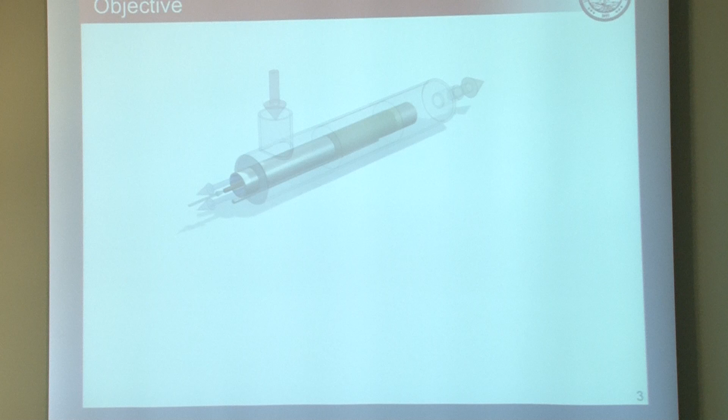The objective of this entire PhD dissertation was to produce pure hydrogen. I used the membrane reactor as a tool to achieve this pure hydrogen. I took natural gas and performed natural gas steam reforming within the membrane reactor to produce that pure hydrogen. The idea is to take that pure hydrogen and feed it into a PEM fuel cell, which can then be used for the transportation sector. I picked a PEM fuel cell because it has a low operating temperature, and its only emission is water. Furthermore, as a co-benefit of this membrane reactor, there's a high concentration of CO2, which has potential to be captured, thus mitigating emissions from the transportation sector.

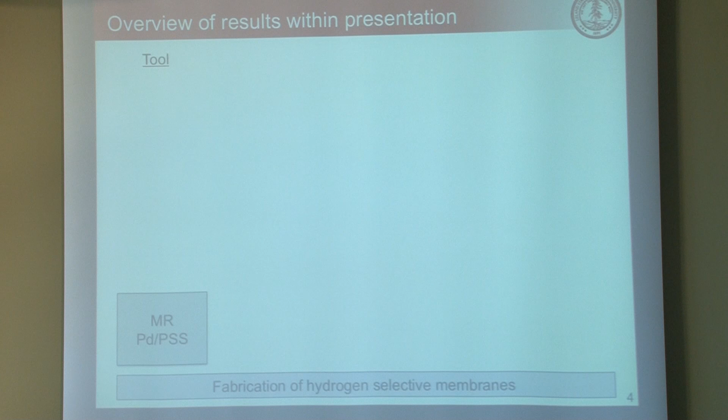A little bit of an overview of the results I'm going to show. I'll talk about the fabrication of these hydrogen selective membranes. Then I'll get into the performance of a membrane reactor—MR—using a pure palladium porous stainless steel supported membrane, again using the steam methane reforming reaction, with two different feeds. You'll notice CO2 here, a common component within natural gas—again, the idea is to use natural gas in the end. I'll get into these conditions a little later.

The next membrane reactor I'll talk about is pure palladium on a ceramic supported membrane. Similarly, steam methane reforming—you can see here there's two different kinds of feeds, nitrogen as well as CO2. Again, both of these are common impurities within natural gas. Some of the conditions here.

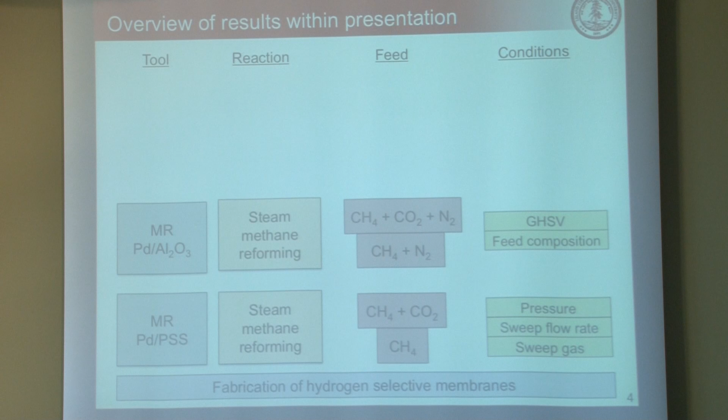The final membrane reactor I'll talk about is an alloy with palladium gold supported on porous stainless steel. With this I'll use natural gas specifically—that is, the mixture of hydrocarbons as well as CO2 within the mixture. So, bringing it up a notch. Here's the conditions. Then briefly at the end, I'll talk about the feasibility of this for onboard application.

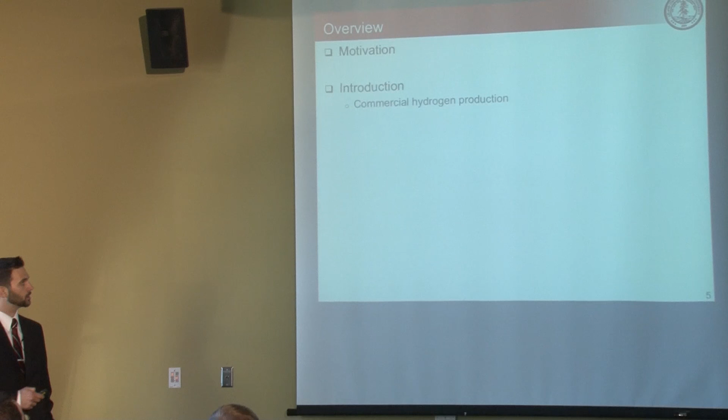A little bit of an overview of the talk. I'll talk about the motivation for this work, an introduction covering commercial hydrogen production currently in the world, and hydrogen production via the membrane reactor. Furthermore, I'll talk about the fabrication of the palladium-based membranes, some experimental results using both steam methane reforming and natural gas reforming, and I'll give a real-world example at the end. All right, let's get into it.

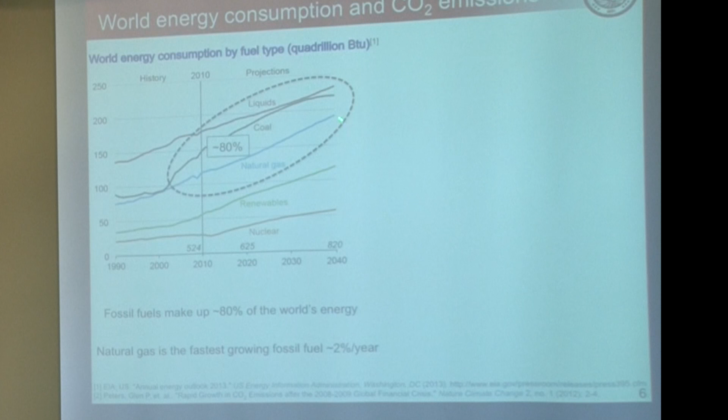The motivation here: as we all know within this department, world energy consumption has historically been on the rise and is projected to continue rising. Specifically, fossil fuels make up about 80% of this increase, and natural gas is the fastest growing fossil fuel at about 2% per year. What does all this fossil fuel translate into? CO2 emissions. We can see developed countries are already at an elevated level, while developing countries show a significant increase in CO2 emissions. All these CO2 emissions have been directly correlated with global temperature rise, which we would like to mitigate.

So let's look at the US specifically. This chart shows the greenhouse gas emissions for the US, and transportation accounts for 26% of those emissions—a significant portion.

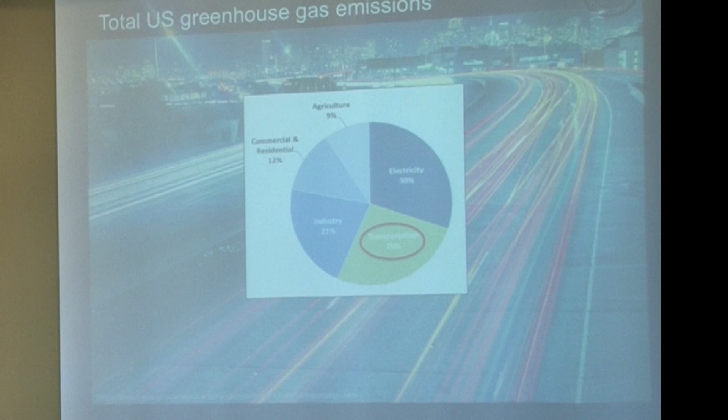If we look at the broader global scale, we can see vehicle ownership. Currently there's about 1 billion vehicles on the planet, projected to increase to 2 billion between 2030 and 2050. All these vehicles translate into more CO2 emissions into the atmosphere. But if we could potentially use hydrogen, maybe we can offset those CO2 emissions.

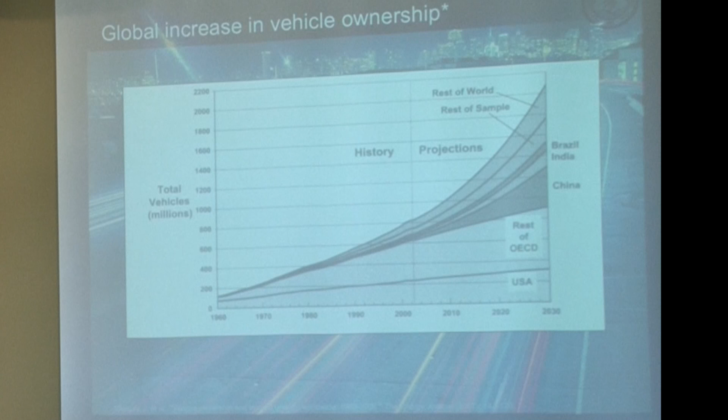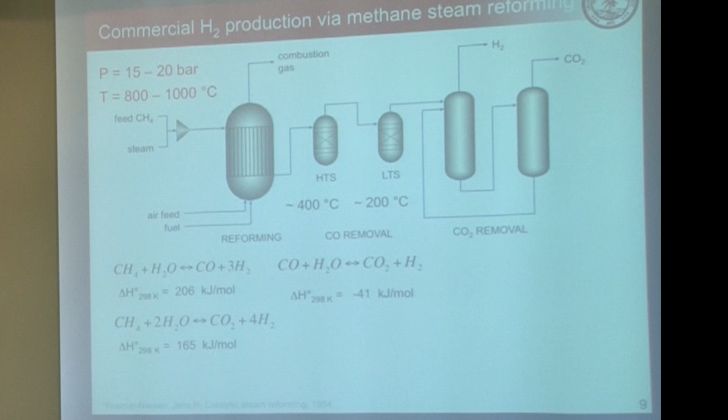So you may ask yourself, well, this process seems pretty large, there's multiple steps. Is there a solution where we can do all of these in one? There is—that is the membrane reactor. We can take this reforming process as well as the two reactors plus the purification and separation of hydrogen into one unit, all these steps into one. Powerful. So let me talk a little bit about how the membrane reactor works.

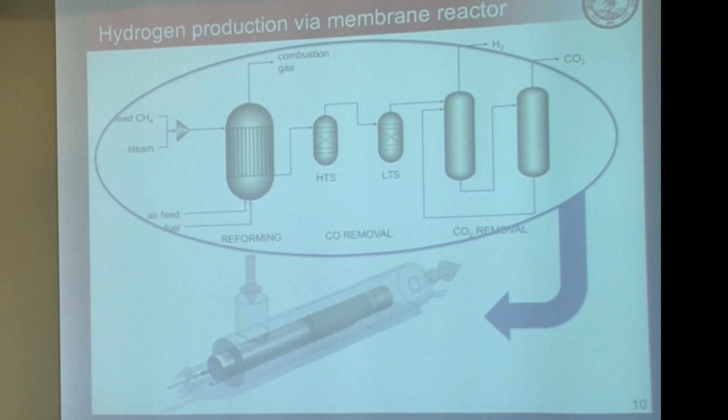So here's a cutaway of the membrane reactor. We can see hydrocarbons, so natural gas, and steam enter into the reactor. They convert into hydrogen here across the catalyst. The palladium-based membrane is only selective towards hydrogen—that is, only hydrogen can permeate through the membrane, shown here.

We can enhance this permeation of hydrogen through the membrane by applying a sweep gas through the permeate side of the membrane, as shown here, and the pure hydrogen comes out on this end here. On the back end, we have the emissions here, and this is known as the retentate side. This is the outlet of the reactor.

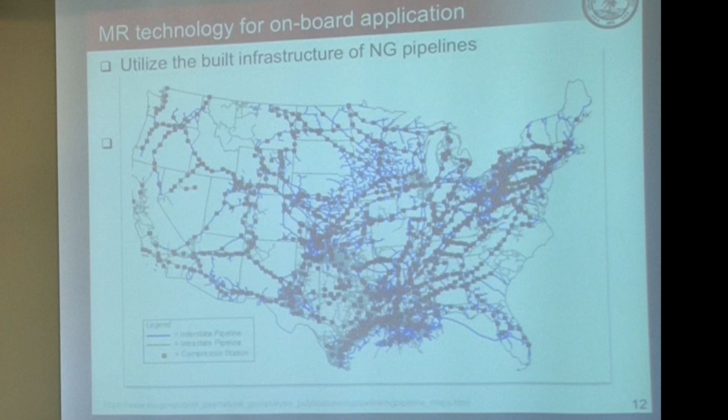Furthermore, this membrane reactor for onboard application can be a possible solution for distributed emissions, which there currently is no feasible technology for. And the reason I propose that is because on the retentate side, it's a CO2-rich stream that comes out, and it's possible that this can be a bridge for sustainable technology to come in the future.

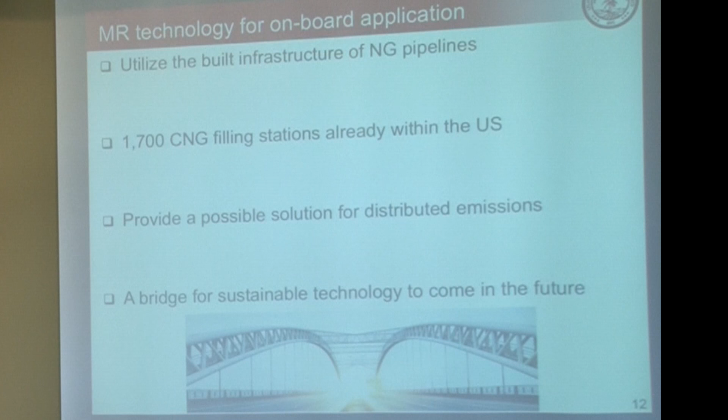So let me talk about why I chose the palladium-based membranes. We see here there's a good amount of membranes for hydrogen separation—that is metallic, polymeric, carbon, as well as two different ceramic type membranes. Let's look specifically at the metallic for hydrogen selectivity. We can see here that it's greater than 1,000, and if we compare that to these other ones, it's significantly greater. Of course, the idea here is to produce pure hydrogen, so that's a winner there.

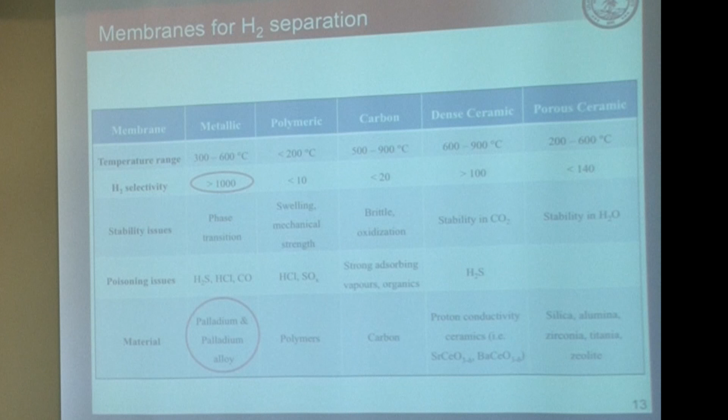Furthermore, if we look at the material used within these metallic membranes, it's typically pure palladium as well as palladium alloy. Palladium alloys are used to overcome some of the negative implications of using pure palladium—that is hydrogen embrittlement that happens with pure palladium, as well as being poisoned by sulfur. Specifically, sulfur is H2S, hydrogen sulfide, which is also a common impurity found within natural gas. So again, we can overcome these limitations of using pure palladium by alloying it with another metal, and I'll get into those details a little bit later. So metallic here is the clear winner.

So let me go into a little bit of how the fabrication of these hydrogen selective membranes was done. I was personally able to fabricate 6 of these membranes, as Jen mentioned, at Worcester Polytechnic Institute in Worcester, Massachusetts.

I used 2 different supporting materials of several that can be chosen: ceramic and porous stainless steel. Let me briefly talk about ceramic. The reason I use it is that the supporting material is characterized by small pore sizes, on the nanometer scale. Furthermore, ceramic is typically cheaper than some of these other supporting materials.

If we look at the porous stainless steel, it's good from a mechanical standpoint, that is, its stability is very good after the deposition of the layer on top. Furthermore, the thermal coefficient of expansion is very similar to that of palladium, or the palladium alloy that will be deposited on it. But unfortunately, the porous stainless steel supports have pretty high pore sizes, on the micron scale.

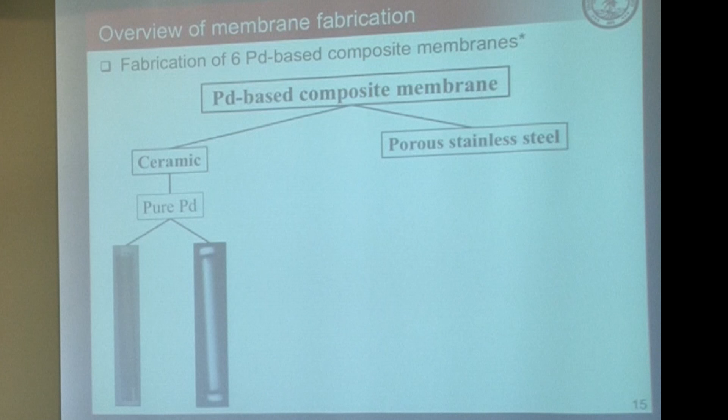So a little bit of detail here. For ceramic, I made 2 pure palladium membranes. And for the porous stainless steel, I made a pure palladium, as well as a gold-palladium-gold, palladium-gold-palladium, and palladium-gold. I tried to get all the combinations there. So specifically today, I'm going to talk about 3 different membranes, these 3 highlighted here. But before I talk about those membranes, let me briefly introduce how these membranes are actually made.

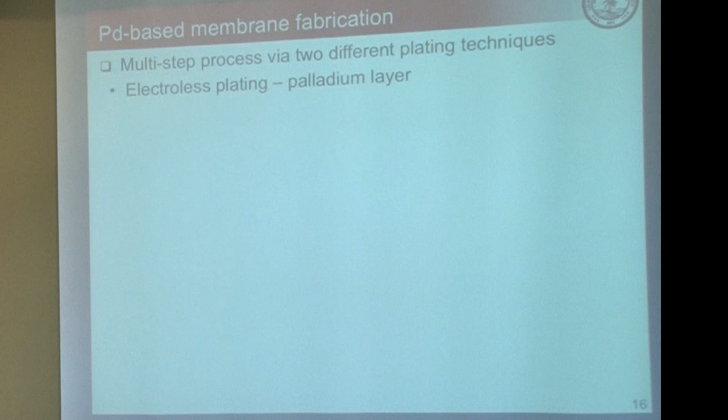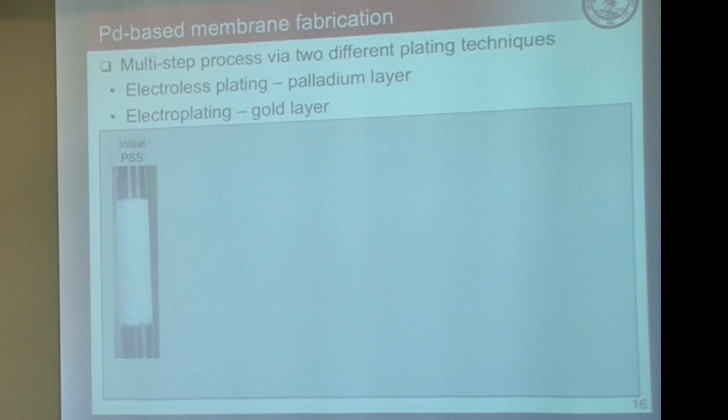This is a multi-step process via two different plating techniques: electroless plating for palladium, and electroplating for gold. So we started, for this specific example I'm going to show here, with the porous stainless steel support. You might notice here this color - this is actually a zirconia layer on the porous stainless steel support.

These porous stainless steel supports are obtained commercially. So what I had to do to prep this area is I had to actually sand it down a little bit, because the zirconia layer is potentially a little bit too smooth for the deposited layer to adhere. So after the sanding, there's an intermediate layer. This intermediate layer mitigates the intermetallic diffusion between the palladium layer that's about to come and the porous stainless steel support below.

So after this intermediate layer, first palladium plating, followed by a second, and then in this specific case, there was gold on top of that palladium, and then this was followed by a final palladium plating layer. That final palladium layer is to enhance the hydrogen flux initially when the membrane is brought up to temperature.

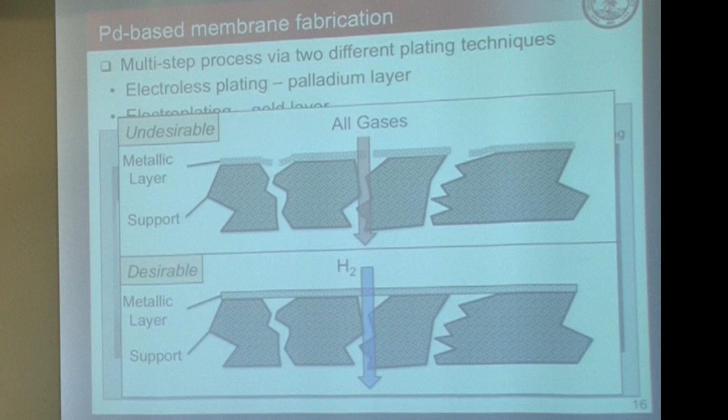So the whole point of this process, shown in the schematic - this is the undesirable case. That is, if I put this metallic layer and it doesn't bridge the supporting material below, it'll allow the permeation of all gases to flow through the support. Of course, the idea here is to be completely selective towards hydrogen to get that pure hydrogen I would like. So we can see in the desirable case, the metallic layer bridges the support below and is only selective towards hydrogen. Now let me talk a little bit about how hydrogen actually permeates through the metallic layer.

Shown here, this is the high pressure side, that is the feed side of the reactor. Hydrogen, H2, adsorbs to the surface, then dissociates into atomic hydrogen, H and H, diffuses through the metallic bulk, recombines on the low pressure side into H2, and then desorbs. Again, the low pressure side is typically referred to as the permeate side.

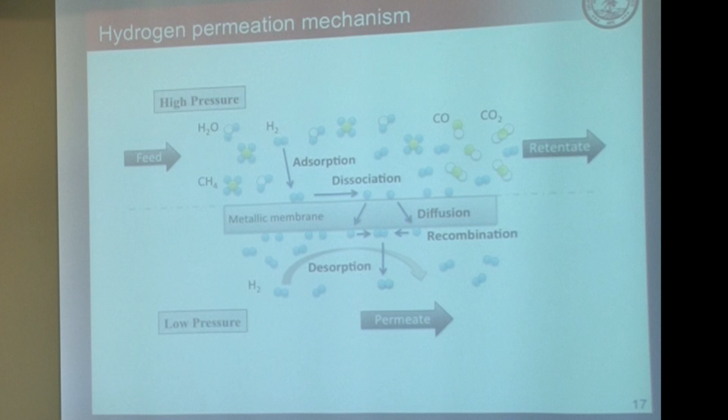So let's get into some of the results here. This first set of experiments is with the membrane reactor using pure palladium on porous stainless steel.

Shown in this picture is my second home here at Stanford, sometimes my first home, of course. Let me walk you through what this is here.

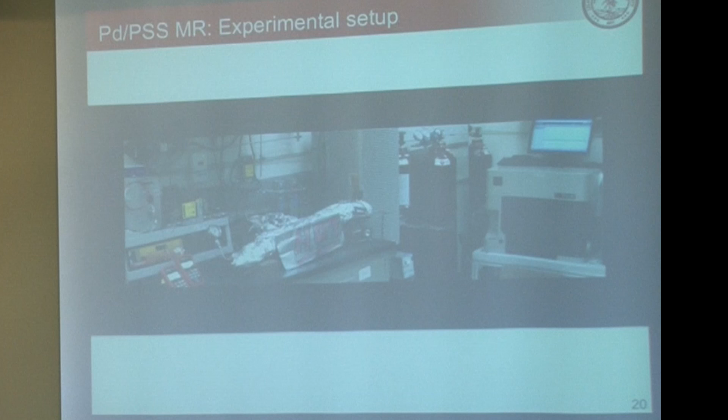So we have the feed as well as the water, and essentially I want that into steam. That enters in this preheating zone, which brings the feed and the water up to temperature, so that when it enters into the reaction zone, it's up to temperature already. All these experiments were characterized via a mass spec, and this mass spec can detect parts per billion, so very accurate.

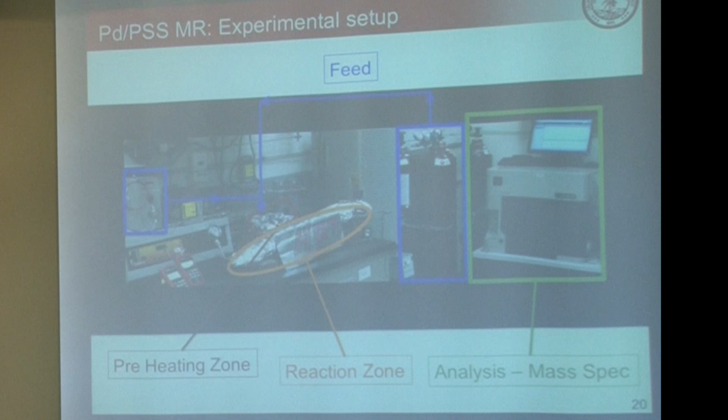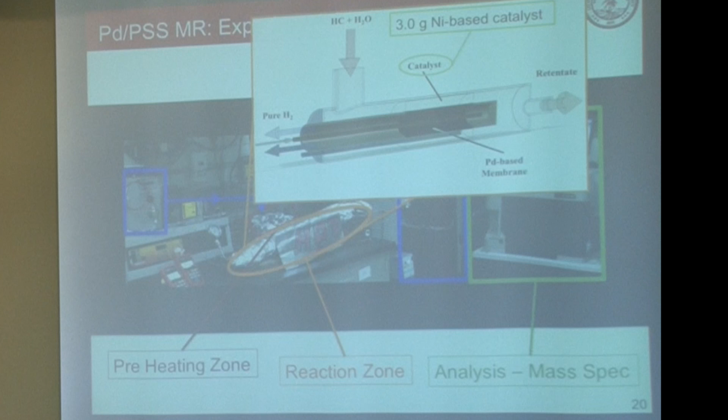If we look a little bit at the reaction zone, we can see this is the membrane reactor, as shown earlier. In this membrane reactor, I had 3 grams of a nickel-based catalyst, obtained from Johnson Matthey specifically. The membrane used was a pure palladium, porous stainless steel supported membrane. A little bit of the details: the palladium layer was 13 microns thick, the active length of the membrane was 14 centimeters, and the outer diameter was 1 centimeter.

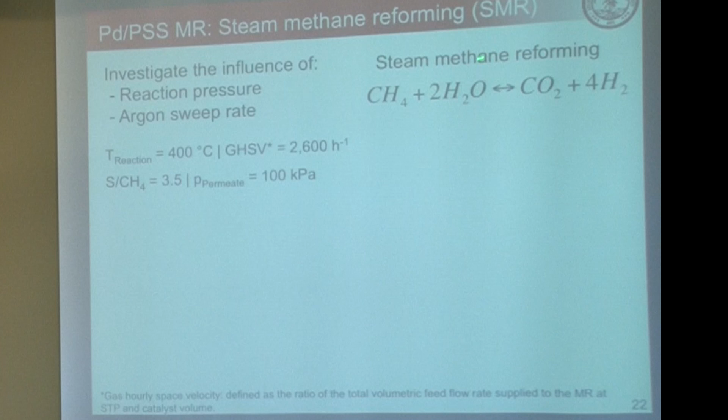Furthermore, shown here is the steam to methane ratio. Here I use 3.5 to 1. Theoretically it's 2 to 1, meaning for every 1 mole of methane, there should be 2 moles of water. The reason I use an excess of steam is twofold: one, it promotes this reaction towards its products, thus making more hydrogen, and secondly, it mitigates coke formation within the reactor.

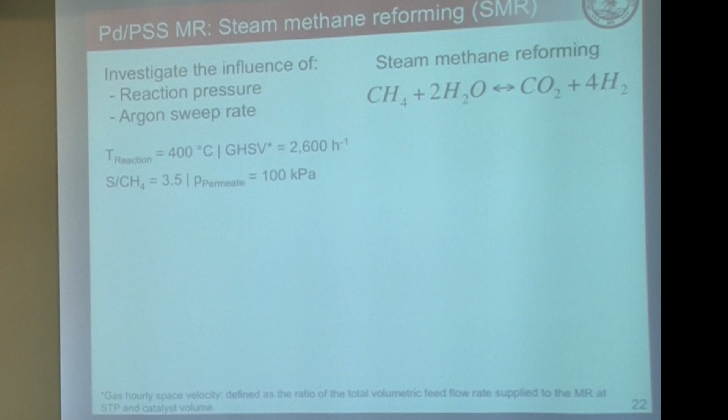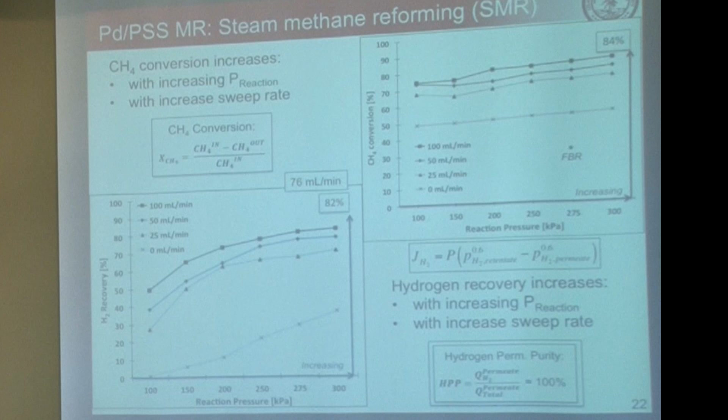Furthermore, as we increase the sweep rate, we can see a higher hydrogen recovery. For this specific set of experiments, I was able to obtain 82% hydrogen recovery, that is, 76 milliliters per minute of pure hydrogen from this process. Furthermore, I'd like to point out that the hydrogen permeate purity here was 100%, meaning only hydrogen was detected via the mass spec, no other species.

Another set of experiments I tried was adding carbon dioxide to the steam methane reforming reaction. This was twofold: one, it's commonly found within natural gas, as mentioned earlier, at about 3 volume percent. Furthermore, it's a product of the steam methane reforming reaction, so if we add a product of the reaction, it should negatively affect the conversion of methane. Let's see what some of those results look like.

So now you may think, well Bryce, this is cool here, but you're using argon as a sweep gas, and you told me the hydrogen is pure, but now we have argon as well as hydrogen, which is a separation issue. So if we think of the onboard application, what can we do for that?

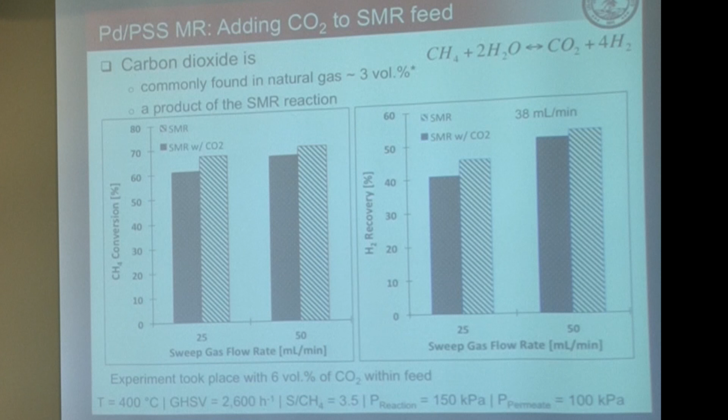Well, we can provide steam in the permeate side, which is easily condensable, thus can be used for onboard application. So let's look at what those results look like.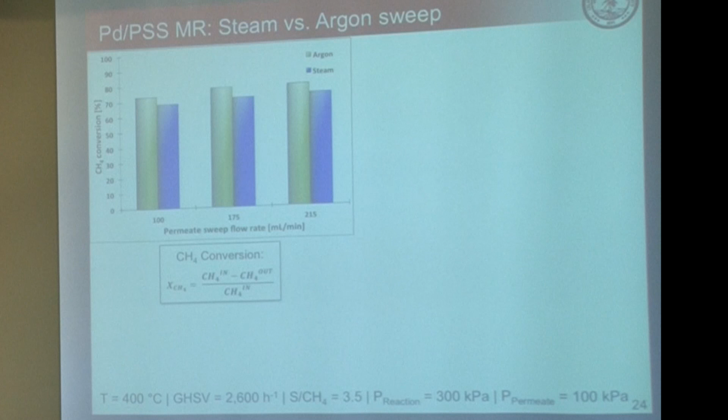This is important because, as mentioned, the steam can be used for the onboard application purposes. Furthermore, in the experimental testing, it's actually easier to use argon as a permeate—it's just one less complexity to the testing.

After these reaction tests, as well as others I'm not mentioning today for time, we can analyze the life of the membrane. We can see from this plot the ideal selectivity of hydrogen to argon. Initially it was infinite, that is, fully selective towards hydrogen, but it decreases over the experimental time. The total life here was 750 thermal hours, meaning it was up to temperature for that long, and of those 750 hours, 500 were under reaction testing.

If we compare the first test with the membrane reactor to the last test, we can see that the ideal selectivity decreased from infinite to just 30. Looking down this chart, all the parameters decrease. Specifically, the hydrogen permeate purity, instead of being 100% as it was initially, decreased to 90%.

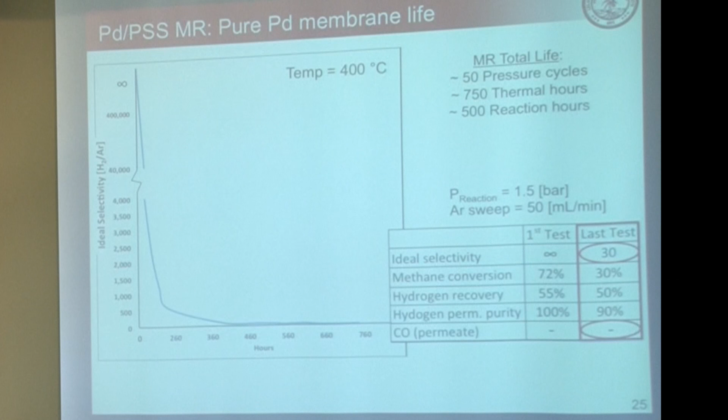Importantly, there was no CO detected in the permeate side. This is significant if we want to feed this to a PEM fuel cell, because only a few ppm of CO can poison the platinum catalyst within the PEM fuel cell. So I wanted to investigate why this ideal selectivity was so low.

So I wanted to zoom in further and look at the surface. I took some SEM images of the palladium surface. As we can see, highlighted in these red circles, there are actually holes within the palladium layer. If you look specifically here, it's very clear there's a hole in that palladium layer, again allowing permeation of all gases through the membrane. This is why we had this low ideal selectivity.

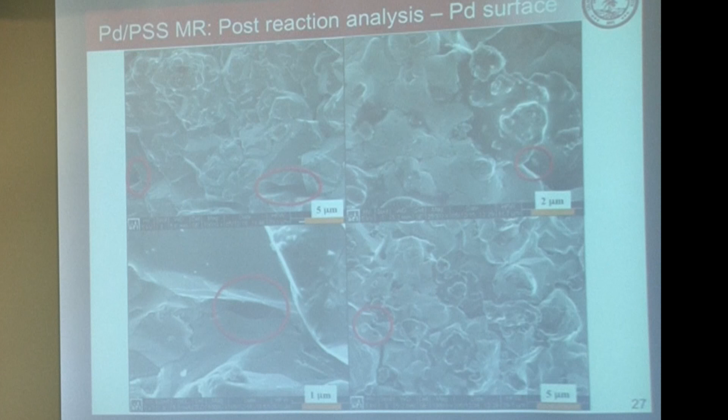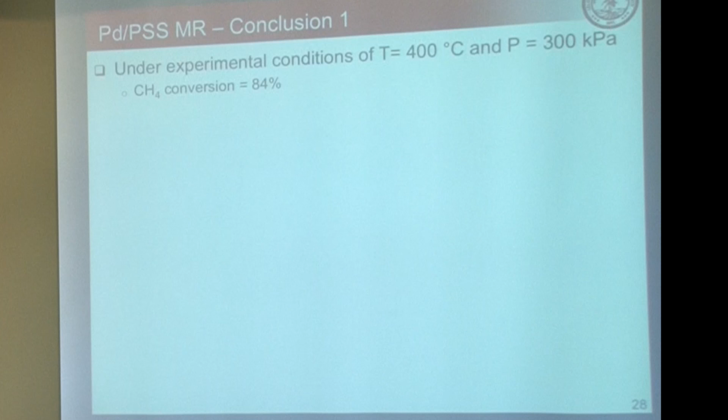So the conclusion of these results: by operating at a low temperature of 400 and a low pressure of 300 kilopascals, I was able to achieve a methane conversion of 84%. Furthermore, a hydrogen recovery of 82%, meaning I was able to obtain 76 milliliters per minute of pure hydrogen.

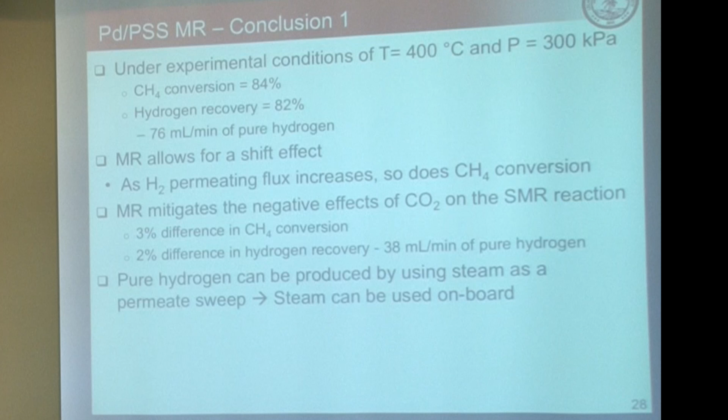As shown, the membrane reactor allows for the shift effect, meaning as the hydrogen permeating flux increases, so does the conversion of methane. Furthermore, I showed that the membrane reactor mitigates the negative effects of adding CO2 to the feed, resulting in just a 3% difference for conversion and just a 2% difference for hydrogen recovery. I also showed that pure hydrogen can be obtained using steam as a sweep, which is important for onboard application purposes.

Towards the end of the membrane's long life, unfortunately, it was not fully selective towards hydrogen. But as a potential benefit, there was no permeation of CO on the permeate side. So I thought, given the membrane degraded over time, is there a way to overcome that limitation? So I tried a palladium membrane supported on a ceramic support.

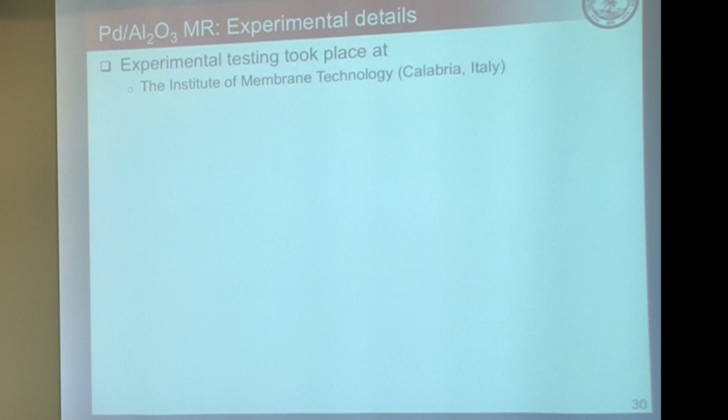This experimental testing took place at the Institute of Membrane Technology. As Jen mentioned earlier, I was able to go there in Calabria, Italy, the southern part of Italy, for one month and perform some reaction testing. Here's the membrane, the palladium with ceramic supported membrane. Specifically, the palladium layer is 11 microns, the active length is 7.4 centimeters, and the outer diameter is 1 centimeter.

Before reaction testing could start, I did the hydrogen permeation test to find the n value of 0.6 at 400 degrees Celsius. Again, most likely the membrane will not be fully selective towards hydrogen. So let's look at that module I used.

Here we have the feed that enters the reactor. This is the retentate side on this side. And then you can see here the sweep gas that comes through the core of the membrane and provides that pure hydrogen on this side, the permeate side.

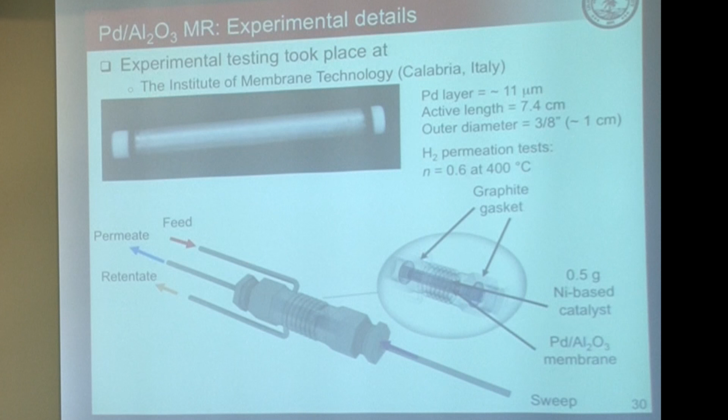More specifically, this membrane was held in place via two graphite gaskets, which minimize the leakage between the retentate and permeate side. That way, when we analyze the permeate side, we know that any gases there permeated through the membrane. Specifically here, I used just half a gram of nickel-based catalyst.

The operating conditions here are similar to those of the previous experiment. I'd like to note that instead of using argon, I used nitrogen sweep. Let's look at the results.

Here I have 2 different mixtures. The first is the steam methane reforming reaction, that is methane plus steam plus 3% nitrogen. The second mix is the same steam methane reforming plus nitrogen as well as CO2. I used CO2 and nitrogen because these are common impurities found within natural gas. Again, the end result here is to use natural gas.

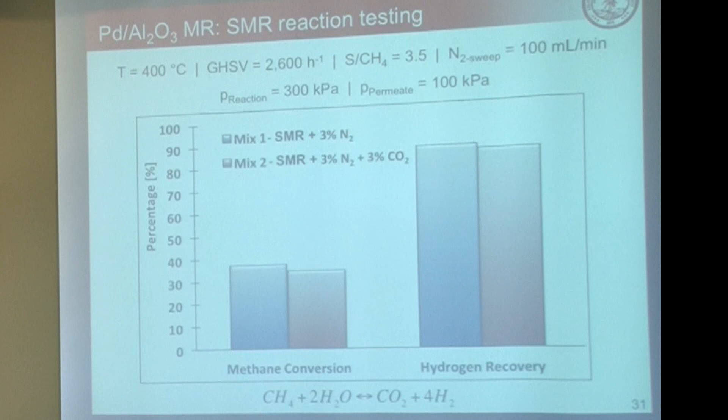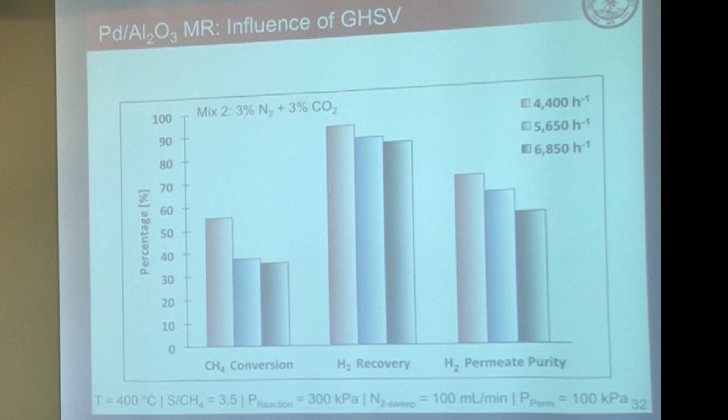Furthermore, I looked at the influence of the space velocity. As I varied the space velocity, we can see a decrease in the methane conversion. This is due to an increase in space velocity meaning less residence time within the reactor, so the reactants have less contact time with the catalyst.

As a benefit of this reactor, the hydrogen recovery was high, that is 92% for the lowest space velocity. But unfortunately, if we look at the hydrogen permeate purity, just 72% was obtained at the lowest space velocity, so not pure hydrogen. So I took the membrane out.

I wanted to analyze what went on here with the membrane, because clearly something was wrong. So again, some SEM images.

Here is the cross-sectional analysis of the membrane. We can see the palladium layer here on top of the ceramic support. If you look here, you can see that it appears as though the adhesion of the palladium layer is not very good with the ceramic below.

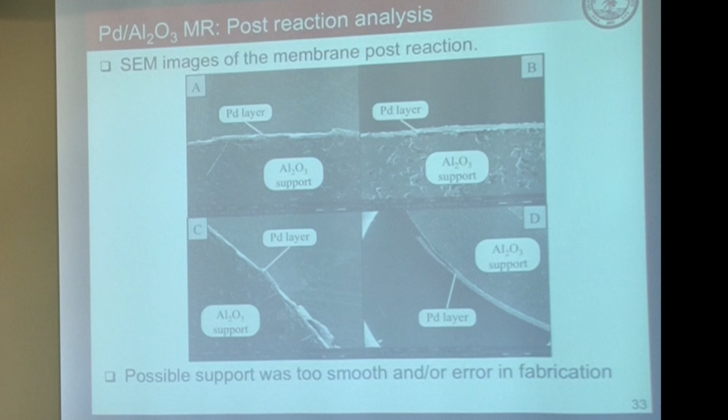This further drives home that point. As you can see, the palladium layer here appears to be peeling off the support below, also shown here. So unfortunately, this membrane didn't perform very well, that is, the support below maybe was too smooth, and/or there was an error in the fabrication process.

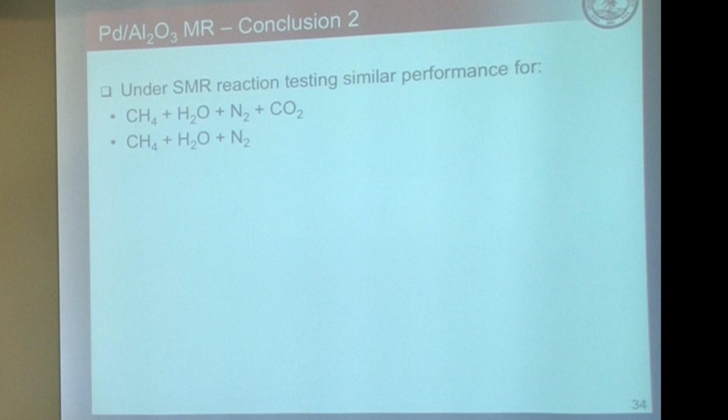So the conclusions from this experiment: there was similar performance using both steam methane reforming and nitrogen, as well as nitrogen and CO2. At the lowest space velocity, hydrogen recovery was 92%, quite high, but unfortunately the permeate purity was 72%. That is, the membrane degradation led to this poor performance.

So I just showed 2 pure palladium membranes on 2 different supports. Now I'm going to show an alloying, that is palladium gold, on porous stainless steel with this natural gas steam reforming reaction. This is the exciting stuff.

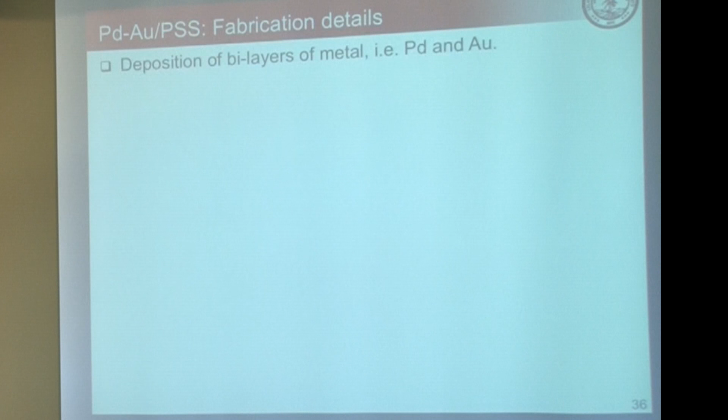So this membrane here was the deposition of 2 different metals, that is palladium and gold. The reason I chose gold here is twofold: the hydrogen permeability will actually be higher for this alloy at 5 weight percent of gold, as well as it's resistant to sulfur.

That is, it's potentially resistant to H2S that's commonly found within natural gas. I won't talk too much today about H2S, but I do in my dissertation on some other experiments that I won't go over today. Let's look at the membrane.

You can see here, here's the permeable area. You can see that gold layer below. On top of this layer is the palladium, which I'll show in just a minute. We see the total layer here is about 14 microns. The gold percent is 5 weight percent, which is known to be a higher permeability, which is why 5 weight percent was chosen. Active length of 3.6 centimeters, outer diameter of 1 centimeter.

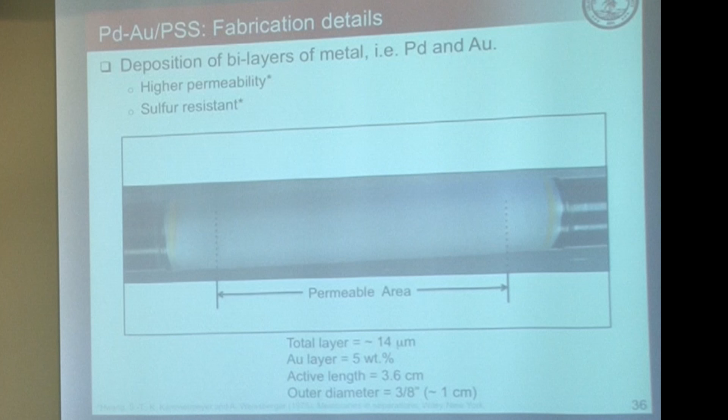So I'll show you a schematic. Again, I started with that porous stainless steel support with the zirconia layer that was commercially obtained. 2 layers of palladium deposited, followed by gold as well as the palladium on top. As mentioned, the palladium on top allows for an enhanced hydrogen flux initially when the membrane is brought up to temperature.

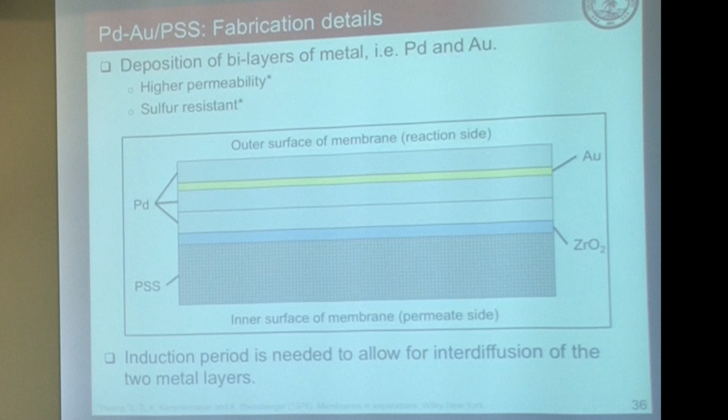Furthermore, as the membrane becomes an alloy, there's an induction period needed to actually interdiffuse these 2 metals together. So this can also help with that, having this sort of sandwich of the metals. So this induction period, let me talk about that.

And I stepped it up to the operational temperature of 450 degrees Celsius, which is the recommended operating temperature for this membrane. When the flux was constant, I was able to perform the reaction testing. But during this annealing process, I was able to characterize the membrane.

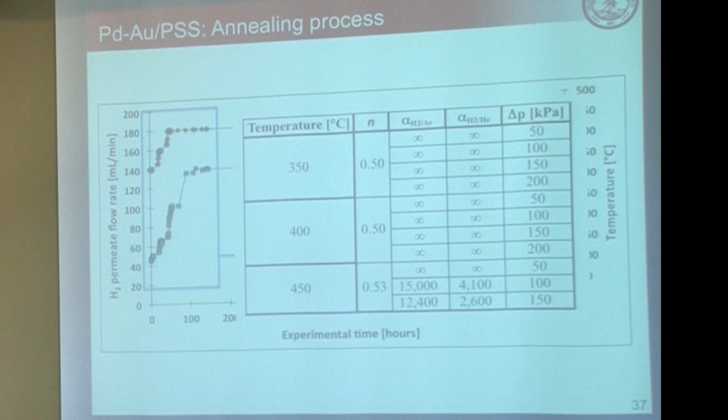Again, if we remember that DOE target is 10,000 for hydrogen to nitrogen, you can see that here for the argon results, they exceed that value. And after, I'm going to talk about the reaction testing here, which was in this time frame.

So some of the reaction details. Again, here I use natural gas steam reforming, and I'll compare that to pure methane steam reforming. The conditions are similar to those in the previous, but here I use the reaction temperature of 450 degrees. Again, this is related to the membrane's operational temperature.

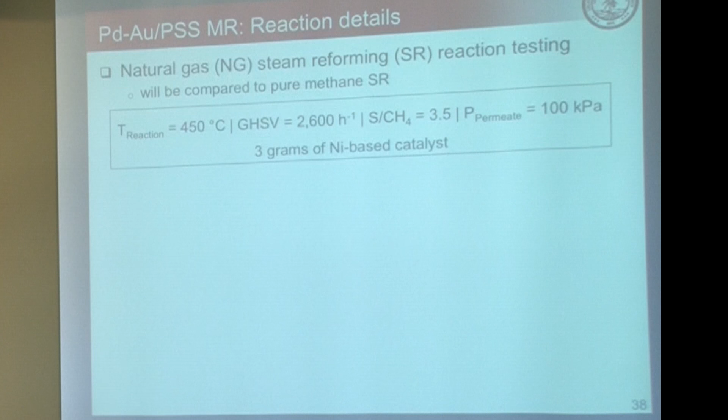Furthermore, composition of natural gas similar to pipeline quality. So I obtained data from PG&E from the Bay Area, shown here, of the various hydrocarbons as well as the impurities of nitrogen and CO2. And this is the experimental gases that I used. As you can see here, they're in good agreement with the pipeline quality.

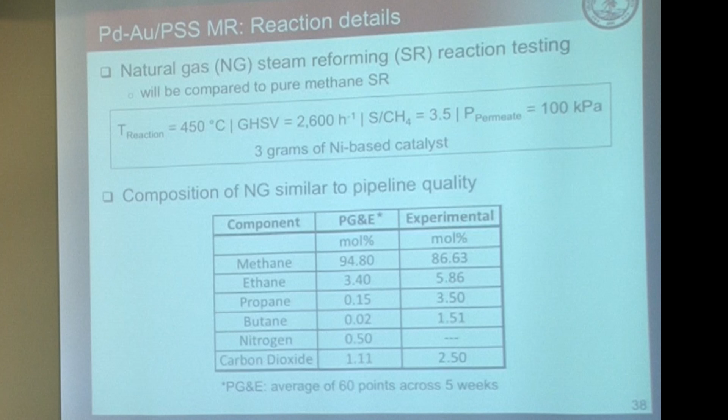So some of the reactions that take place, you can see here there's a significant amount of reactions that can take place within the reactor. That is owing to each one of the hydrocarbons respectively for their steam reforming. Shown here are just some of the dominant pathways of these reactions. Specifically, I would like to point out that some of these, ethane and butane, can actually produce methane within the reactor.

For hydrocarbon conversion, I'll talk about, that's the flow rate of the respective hydrocarbon in minus the flow rate of the respective hydrocarbon out, divided by the flow rate in. All right, let's get into the results.

So here I show pure methane. Again, this is with the same reactor. A pure methane feed here and natural gas feed. You can see for natural gas that the methane conversion was lower.

There's potential here that the formation of methane actually is part of this gap. That is, within the membrane reactor itself, the conversion of methane may have been similar to that of pure methane. But owing to the formation of methane, we see here a decreasing conversion.

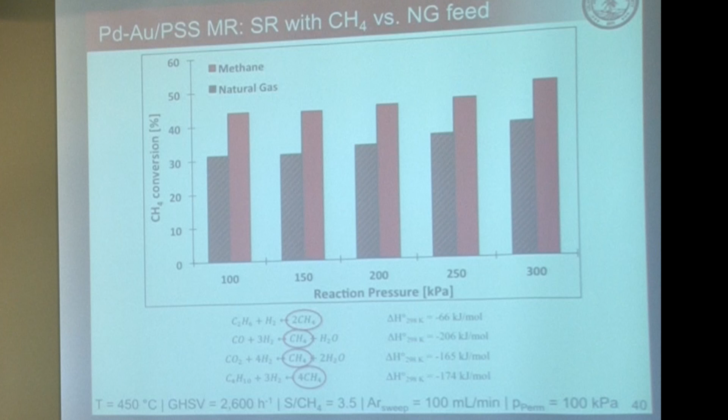Let's look at the hydrocarbons. So we have here butane, propane, and ethane. As we see here, as we increase the pressure, we see an increase in conversion. Again, if we look at these reforming reactions, they proceed with an increasing mole number.

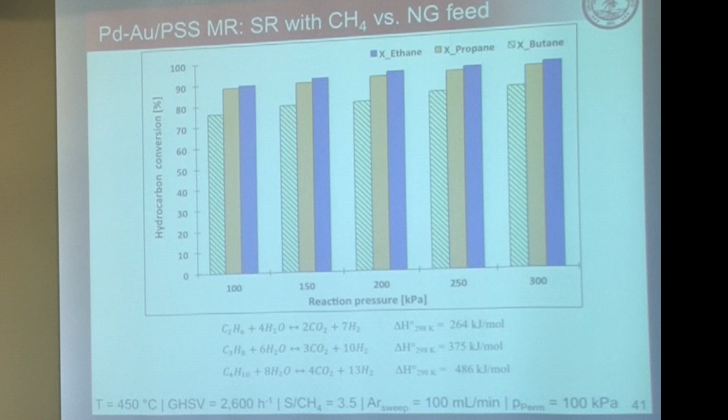That is, from a thermodynamic standpoint, as you increase the pressure, these conversions should decrease. But owing to the membrane's ability to shift these reactions towards their products, we can see an increasing conversion as we increase the pressure.

So specifically here, let's look at some of the hydrogen recovery. We can see here for natural gas that the hydrogen recovery is higher when compared to methane. This, if you look at these steam reforming reactions here, we can see that each one of their respective hydrocarbons produce more hydrogen per reaction. So I would expect there to be more hydrogen for the natural gas.

Specifically here, at the highest pressure, I was able to obtain 51 milliliters per minute of pure hydrogen. That is natural gas into the reactor, pure hydrogen out.

If we look here at the CO selectivity, defined by the equation here, but the CO selectivity is just a fancy word for the composition, that is the CO composition, within the retentate side of the reactor. We can see here as we increase the pressure, the CO selectivity decreases. This is owing to the water-gas shift reaction, that is, as the membrane is allowed to selectively permeate hydrogen, we can shift this water-gas shift reaction towards its products. And here at the highest pressure, CO selectivity of 0.62% was obtained.

And now, if we look at the CO2 selectivity here, we see similar to that of hydrogen, that is increasing. Again, this is owing to the shift effect. Specifically here at the highest pressure, we can see that the composition of CO2 in the retentate side was 27%.

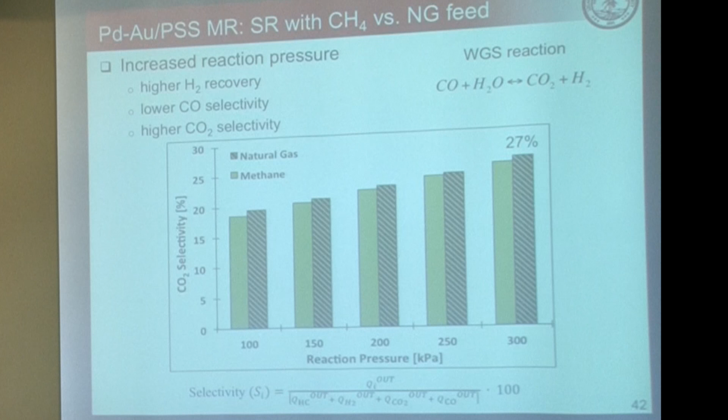So I want to look at the temperature effect on the membrane reactor, varying the temperature between 350 and 450 degrees Celsius. As shown here, as I increase the temperature, we can see an increase in conversion. The reason for this is twofold: from a thermodynamic standpoint, these are endothermic reactions, so as we increase temperature, conversion should increase. Furthermore, as I showed earlier, increasing the temperature of the membrane increases the hydrogen flux, further promoting these reactions towards its products. So again, we can see here an increase in conversion.

Let's look at the hydrogen. For the hydrogen permeate shown in this blue line, at just 350 degrees Celsius, I was able to obtain about 20 milliliters per minute of pure hydrogen production. If we increase that to 450, the flow rate of pure hydrogen was 60 milliliters per minute. Again, this hydrogen was pure, that is, 100% pure hydrogen.

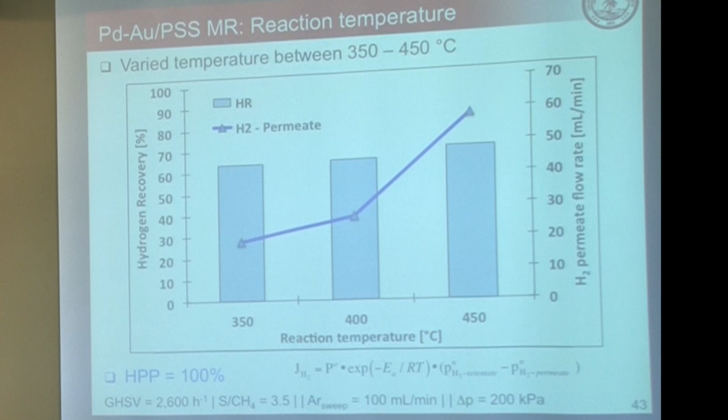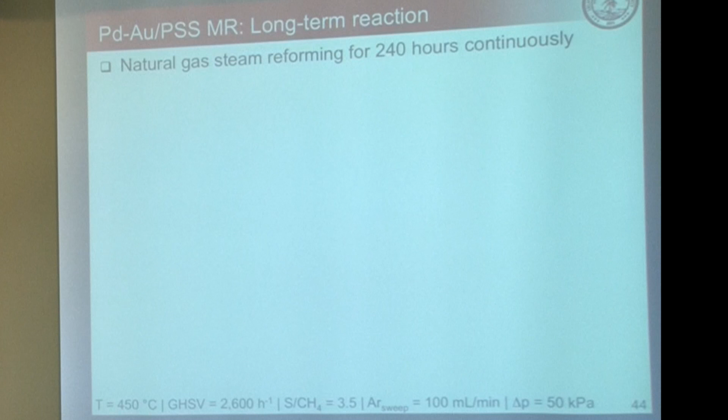Another important test, if this was going to be used for onboard application, is the longevity of these reactions—the membrane's ability to produce hydrogen long term. So here I did natural gas steam reforming for 240 continuous hours. I started this reaction testing after other experiments were done, so the membrane reactor was not fresh. I started at 250 reaction hours. You can see across all 240 hours, the conversions are all constant—no deviation in performance of the membrane reactor.

Furthermore, if we look at hydrogen permeate purity, that was 100%—only hydrogen was detected in the permeate side. If we look at the hydrogen recovery here, it was constant at about 55%, meaning we were able to gather about 55% of the produced hydrogen. Specifically, over this 240 hours, I was able to obtain 700 liters of pure hydrogen.

Let's look at the total hydrogen. Here are the products of the reaction. The total hydrogen produced was 1,100 liters.

To note here, the CO production was very low, which is good—if there's a minimal partial pressure of CO, that will mitigate the potential permeation of CO into the permeate side. Again, we don't want to poison the palladium, and we don't want to poison the PEM fuel cell. If we look specifically at the CO2, the composition of CO2 is 22% in the retentate side.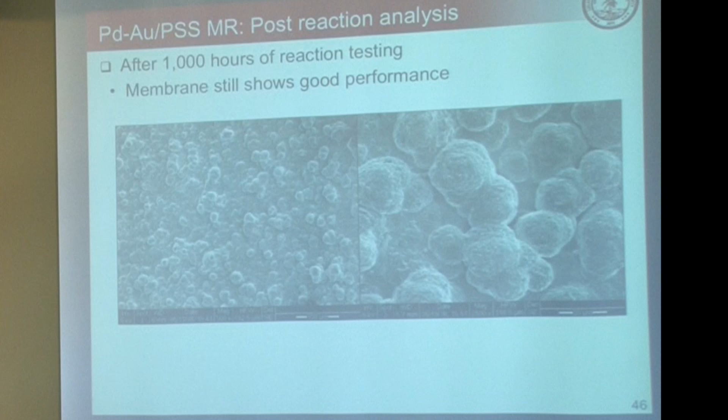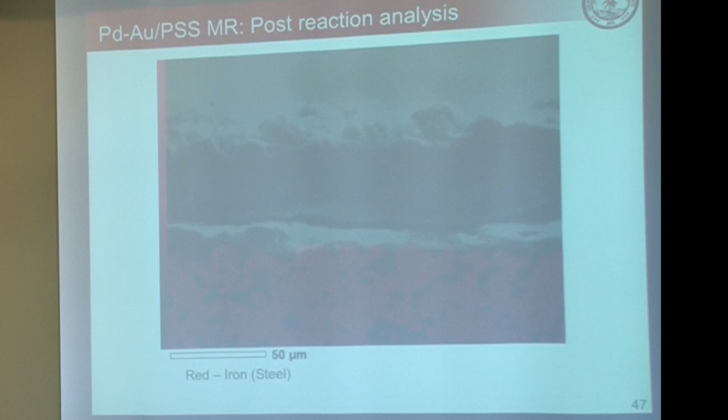This was commercially obtained with porous stainless steel with the zirconia on top.

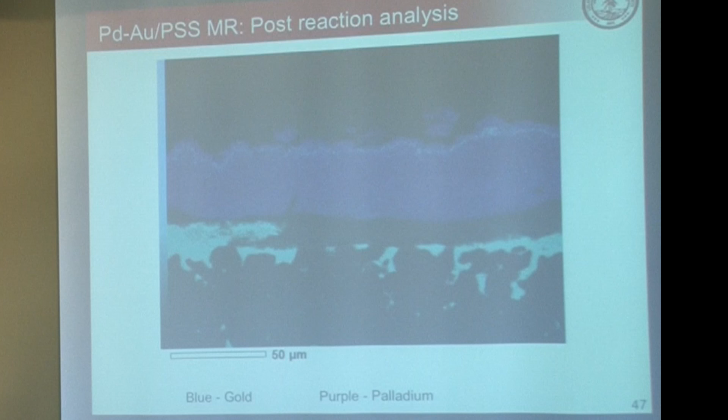Now let's look specifically at that metallic layer. You can see here in the blue, this color is owing to the fact that the EDS signals of gold and zirconia overlap, so just ignore the blue here. But you can see the gold, there's a nice gold-rich layer on top of the membrane. This membrane was palladium gold palladium layer, and you can see that the blue here is within the palladium bulk. If you see here with the palladium, there's a nice overlap, again with that gold-rich layer on top. So the conclusion of this portion is that at these low operating conditions, thinking about the commercial aspect, the temperature is between 800 and 1,000, we're still less than half of that.

Furthermore, the conversion for the ethane, propane, and butane were greater than 75%. And the hydrogen recovery here was 69%. That is, I was able to obtain 60 milliliters per minute of pure hydrogen production.

Long-term reaction testing for 240 hours showed no decrease in performance, and I was able to obtain about 700 liters of pure hydrogen. The membrane performance was stable for 1,000 hours, and as I showed, the alloying was good between the palladium and the gold, with that gold-rich layer on top. So these experiments concluded that the membrane reactor can produce pure hydrogen by feeding natural gas.

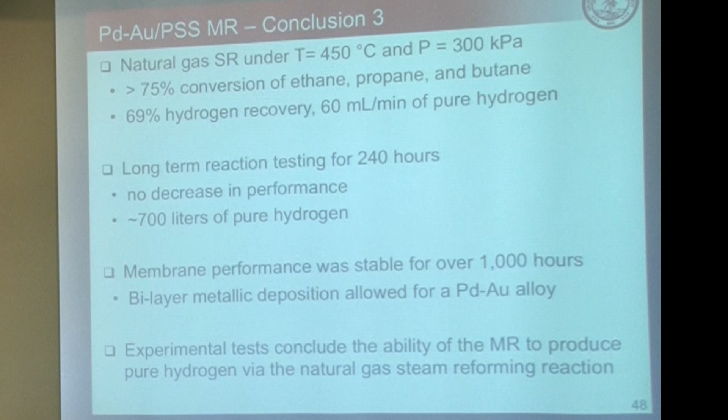I'm going to talk here briefly about the feasibility of this for onboard application. If we look at the current fuel cell vehicles on the market, in order to achieve that 300-mile mark with every fill-up, you need about 5 kilograms total of hydrogen. Or at highway speeds, you need a flow rate of about 1 kilogram per hour. So how many of these membranes, about this size, are needed to produce this flow rate of hydrogen?

We can see here at the low delta P of 200 kilopascals, we need about 190 of these membranes. But if we increase that pressure, we only need about 40 of these. Now, you may be thinking, well, you increase the pressure, and there's an energy penalty associated with that increase in pressure. But the idea here is to potentially use compressed natural gas on board, and compressed natural gas is at about 25,000 kilopascals. We can see an order of magnitude difference in that pressure.

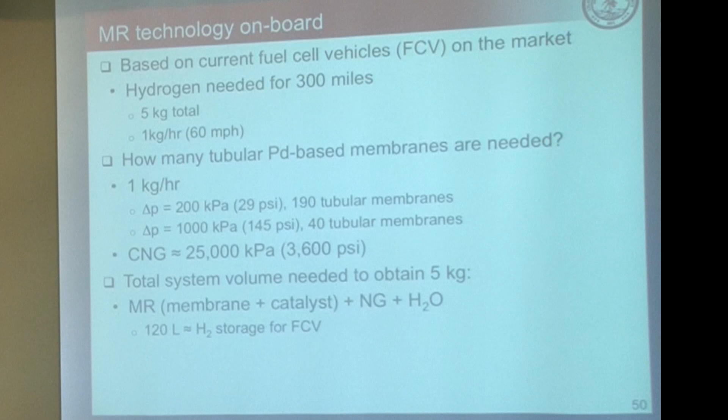So how much volume will this take up? How much space on board a vehicle will the membrane reactor plus the natural gas and water needed for the reaction to produce that pure hydrogen take up? Well, that's about 120 liters on board the vehicle, which is roughly the hydrogen storage for some fuel cell vehicles currently on the market. Or, to put that in context, it's about double the average gasoline fuel tank, so this will take up about 30 gallons of space, if that helps.

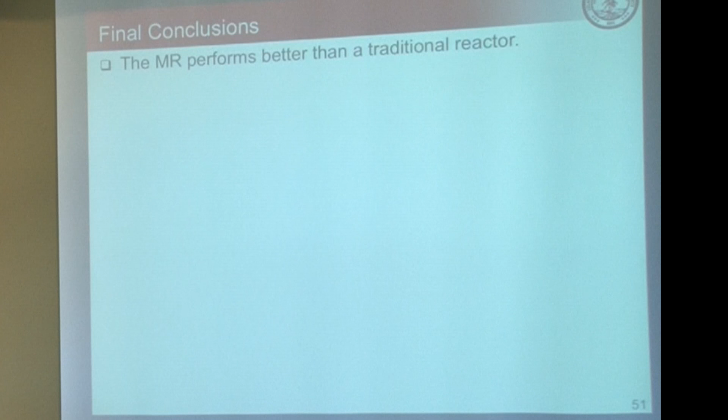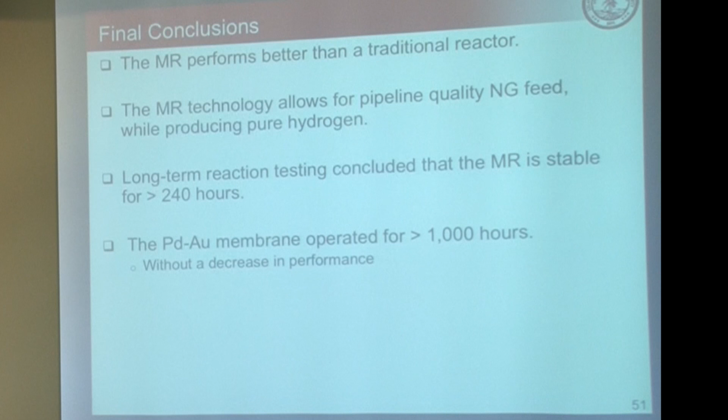So the final conclusions here of this study were that the membrane reactor performs better than the traditional reactor. This membrane technology allows for pipeline quality natural gas feed to produce pure hydrogen. Long-term testing showed the stability of the membrane, with no decrease in performance for 240 hours. The palladium gold membrane operated for greater than 1,000 hours, again without a decrease in performance. This membrane technology can be an effective tool to mitigate the CO2 emissions from the transportation sector, for which there's currently no viable solution. And as I showed, we can use the natural gas pipelines throughout the US.

The hydrogen produced is fuel cell ready, and furthermore, the byproduct is a high concentration of CO2.

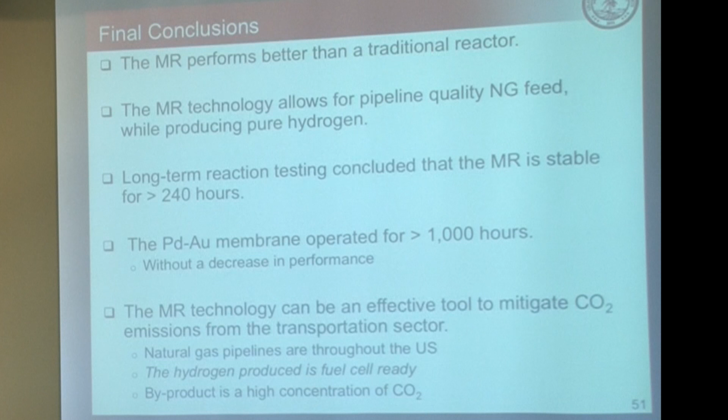Now you may be thinking to yourself, Bryce, that's cool, you showed me some of these results, but I would like to actually see this hydrogen fed into a fuel cell vehicle. I got a solution for you. We see here from the video, this is the membrane reactor in the back here. This yellow tube is providing pure hydrogen to this little fuel cell vehicle, and this is at 350 degrees Celsius.

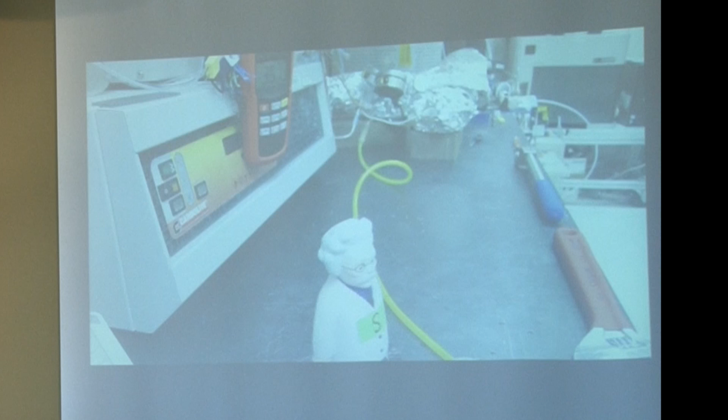Who's the driver? It's the self-driving cars. We're in Silicon Valley, still need some more testing. His name is South, yeah.

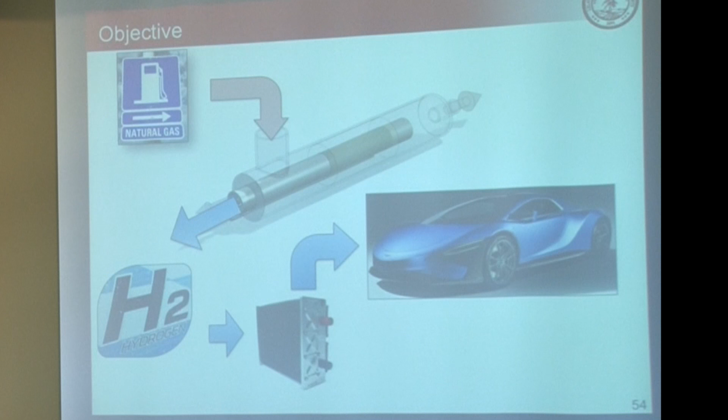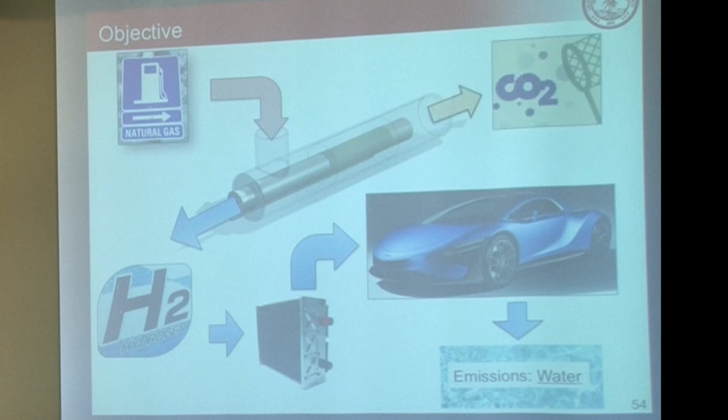So again, the objective here was to produce pure hydrogen, as shown. I did that by using the membrane reactor as a tool for natural gas steam reforming to produce that pure hydrogen, which can be fed to a PEM fuel cell for onboard application within the transportation sector. PEM fuel cell was used because the emissions are theoretically just water. On the back end, as a co-benefit of this process, we have a high partial pressure of CO2 that could potentially be captured. All right, so now to the exciting part.